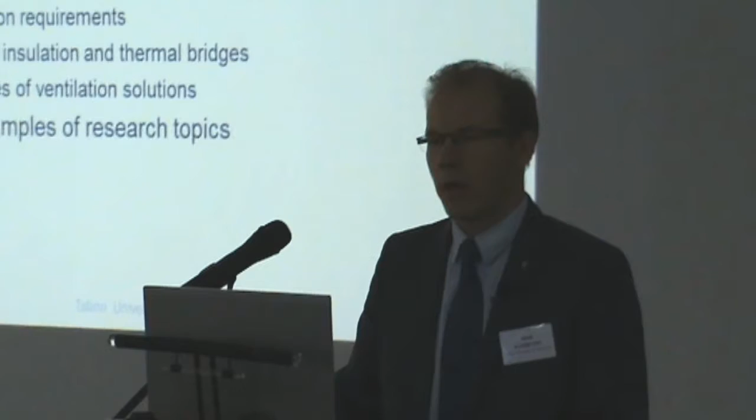Now I'll give some overview about Estonian achievements in energy efficiency related to new buildings and renovation, including Estonian energy performance requirements. Estonia was actually the second country after Denmark to launch nearly zero energy building requirements in regulation. There is also something for major renovations, but this is basically not driving the market. The renovation grant scheme, Kredex, is very well known and really a success story in Estonia, driving the renovation market. Most likely I cannot give many examples about our research topics due to very limited time.

Briefly, in Estonia the history starts from 2007, when the first primary energy-based regulation was prepared. Estonia was likely the first country in Europe conducting cost-optimal calculations. We also published this as a scientific paper, and it's the most cited paper I have ever published. These requirements have already been updated once, with new ones from January 2014, and these new requirements are called cost-optimal because they follow cost-optimal calculation principles, basically a 30-year life cycle calculation for residential buildings with the net present value method.

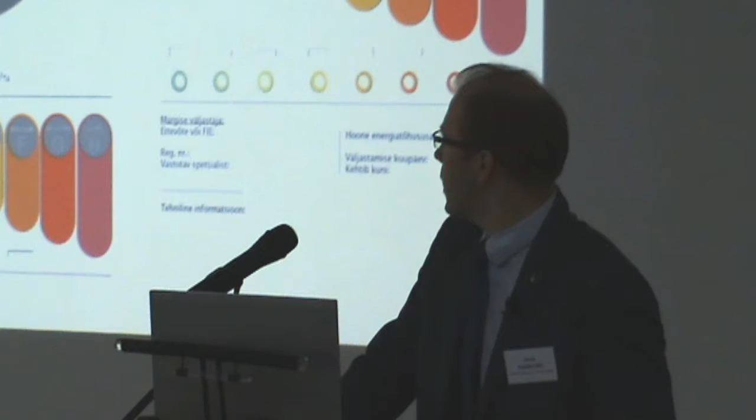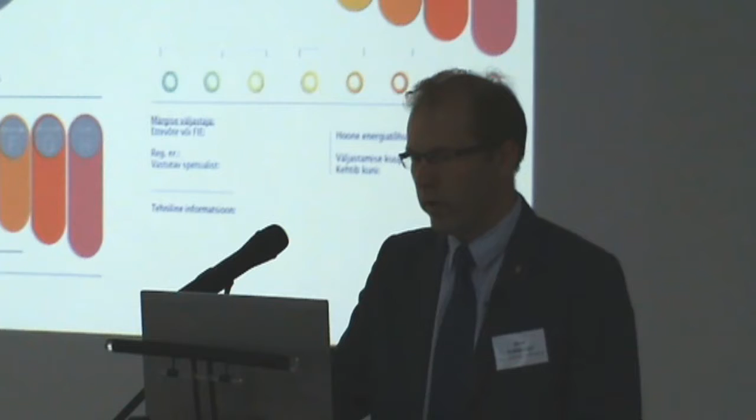How does it look? Estonian nZEB with A-class energy performance certificate is defined as nearly zero. Indeed, its requirements are published, but it's not mandatory yet. We are following the same time schedule as everywhere else in the EU.

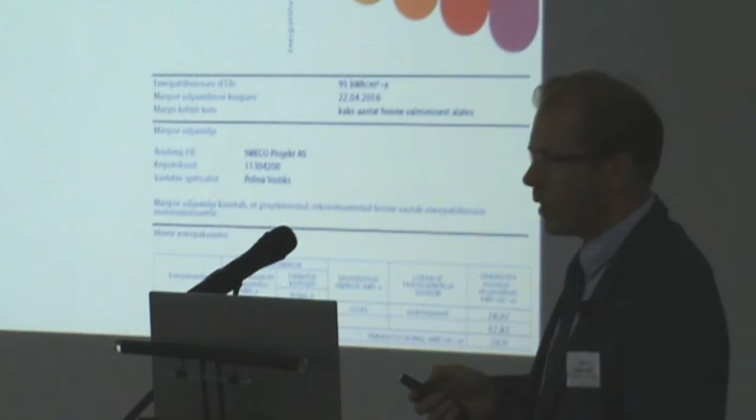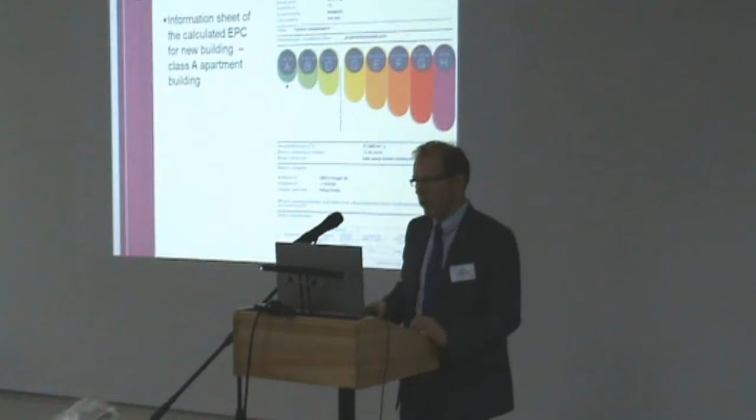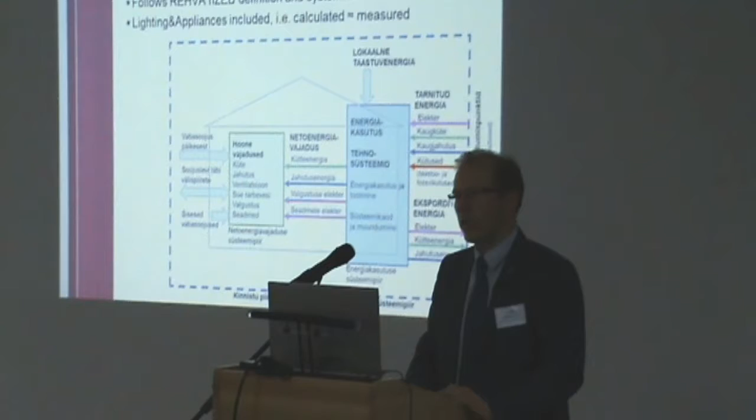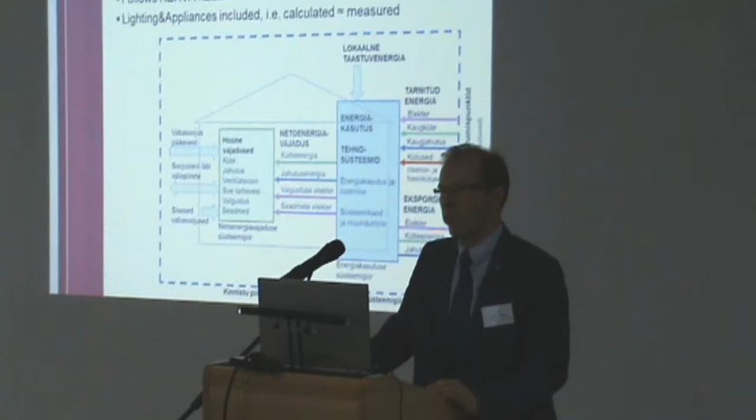This is an example of the information sheet included in that energy performance certificate. You can see this is actually for a Class A apartment building, one of the very first ones being built in Estonia. This is not very old, launched April this year, and the building is under construction. This will actually be the second apartment building which is nearly zero energy in Estonia.

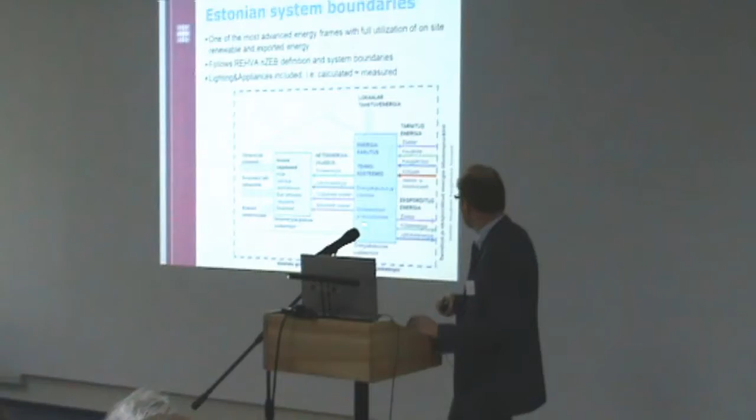The Estonian system is quite advanced - we are using an energy frame which enables full utilization of on-site renewable energy production, and exported energy is also enabled. So there are delivered energies and exported energies, and on-site renewable energy generation is included. It follows the European REHVA nZEB definition and system boundaries.

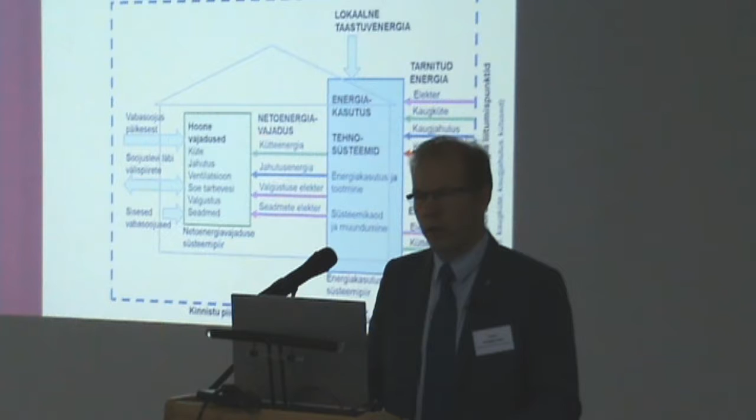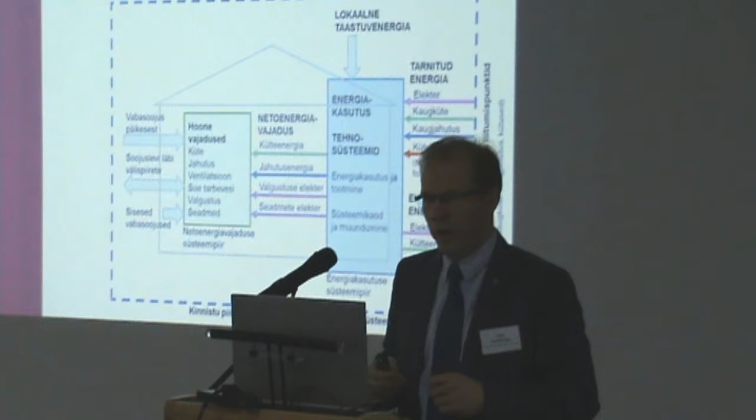What's very special in Estonia is that we have also included lighting, appliances, and plug loads. So it's some sort of all-inclusive energy frame, so that you can expect the calculated and simulated values to be quite the same as the measured values. This is not the case in many European countries.

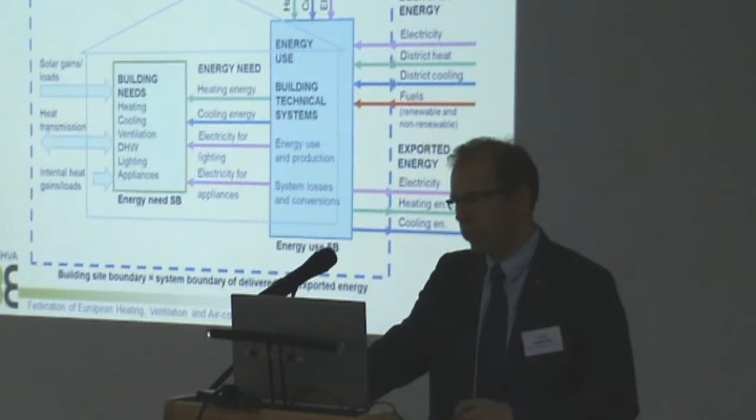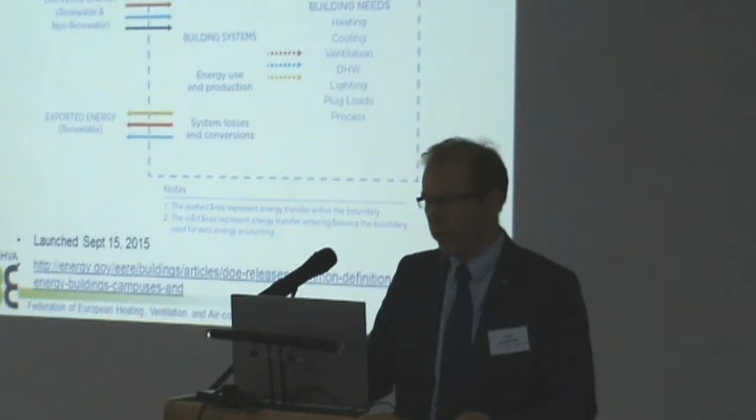This approach was launched by REHVA for European implementation as some sort of technical support for the directive, and has been very well followed in Estonia and, for example, in Finland and some other European countries, and very recently also followed by the US Department of Energy, which published a very similar recommendation.

In Estonian regulation, compliance assessment is based on commercial building simulation tools. There is no official fixed calculation method, but it's required in the regulation that you need a dynamic building simulation for most buildings. The only exceptions are residential buildings which do not have cooling systems, but for all non-residential buildings it needs to be a dynamic building simulation, and it's specified that the simulation tools need to be validated with relevant methodologies. There are also some requirements defined for which simulation tools can be used.

That's the way a very small country like Estonia can really tackle such issues, because a lot of effort has been used worldwide to develop building simulation tools, and they are very well available in the market, even not very expensive ones. So there is basically no need for the government to put funding into developing a national calculation tool. This has actually worked quite well in Estonia, being based on such commercial tools.

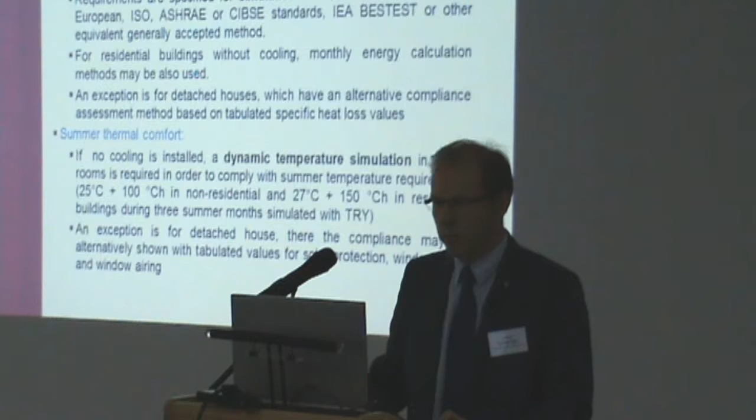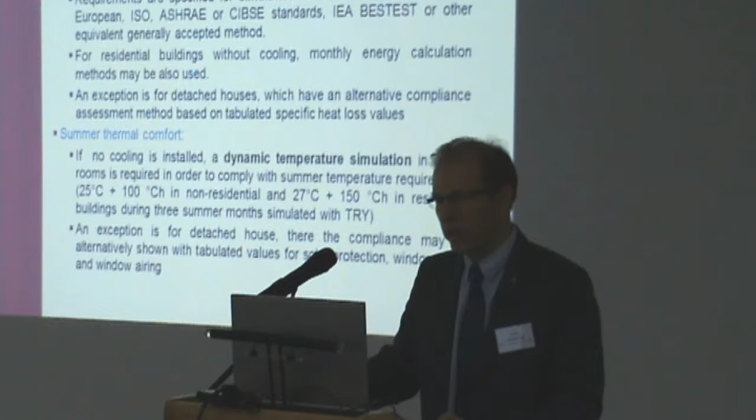The only exception is for detached houses, where you can use tabulated values to prove that there is enough solar protection, window sizes are not too large, and there's enough window airing for night-ventilated cooling to keep temperatures under control.

Starting from minimum requirements we have in force today, these are basically Class C requirements in Estonia, and it's not very easy to compare between different countries, but with some sort of recalculation it is possible.

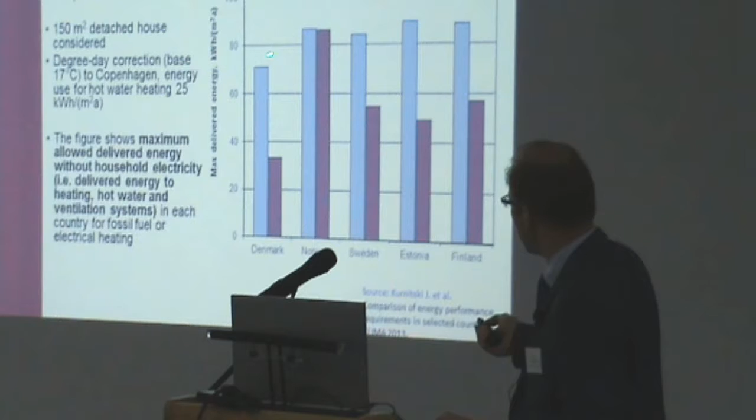This is for detached houses, and you can see very common oil or gas boiler heating, with Estonia, Finland, Sweden, Norway pretty much on the same level, and Denmark is known as a world-leading country in energy efficiency and renewable energy, so they have a bit more strict requirements.

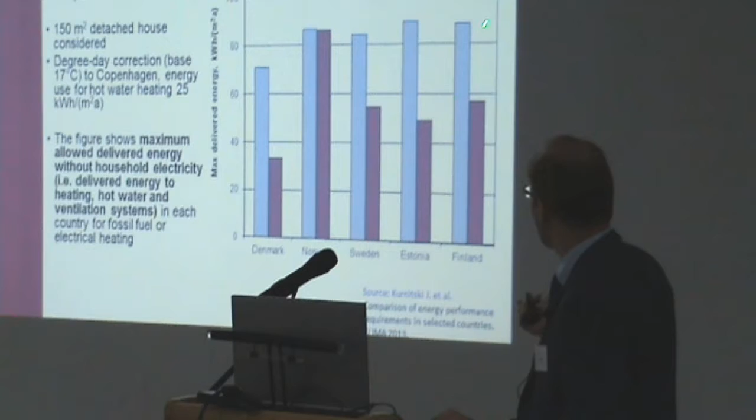It's quite interesting when we look at what happens with electrical heating, because of different primary energy factors and very different energy production, these values are not so consistent. For example, in Norway they do not distinguish between heat and electricity in the building regulation calculation, so there is no difference. In other countries it's quite a lot of difference.

Then a similar comparison for apartment buildings, shown in blue, considering district heating. Estonia is also one of these district heating countries where all major cities have district heating networks, similar to Finland or Sweden. It's quite amazing that in these Nordic countries the requirements are very close to each other for apartment buildings - the quality requirement for the energy performance of new apartment buildings is almost the same. Denmark is once again the leading one.

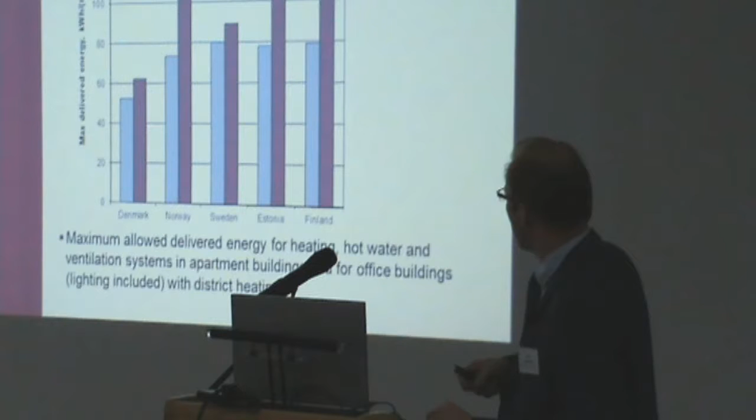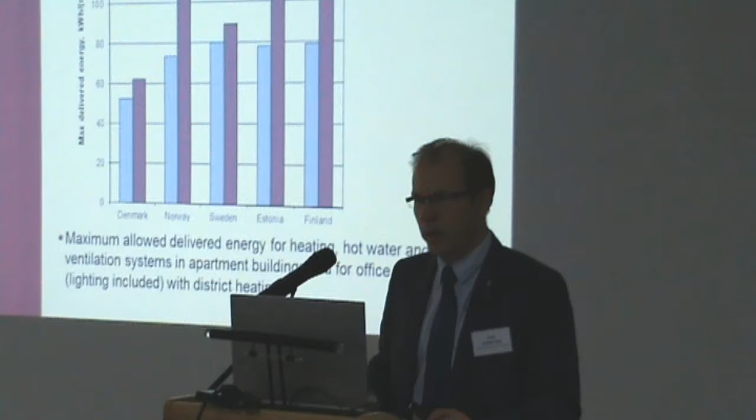When we go to office buildings, there is a bit more fluctuation for different reasons, especially for Finland - some historic reasons in the Finnish code, but this will soon be fixed with much more strict requirements. This is what we have today, and it's very difficult to compare what are nearly zero energy building requirements. I have a couple of ongoing master theses working on this kind of comparison, and it's really a mess - this data is not yet available, not easy to compare.

In Estonia we have specified requirements for 9 building categories, applying both for new buildings and for major renovation.

So primary energy factors you can see here: we are using for electricity 2, fossil fuels 1, district heating 0.9, and renewable fuels 0.75. And there are some examples.

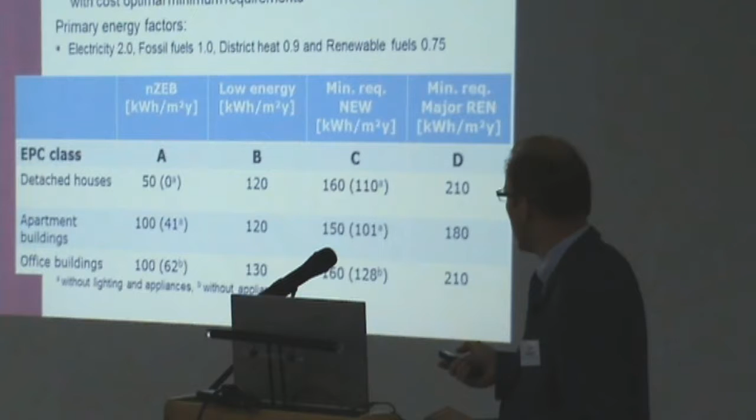For example, in apartment buildings, nZEB is 100, and the requirement we're having today is 150. The values here in parentheses are without lighting and appliances, because in many European countries they operate not with full values but with plug loads - lighting and appliances not included - which makes it more comparable to these countries. So it really depends on what is included in that primary energy indicator.

This is a full set of these 9 building categories showing that the energy use intensity in the buildings, and also operation times, are quite different, and the requirements - the numeric values - have a large variation.

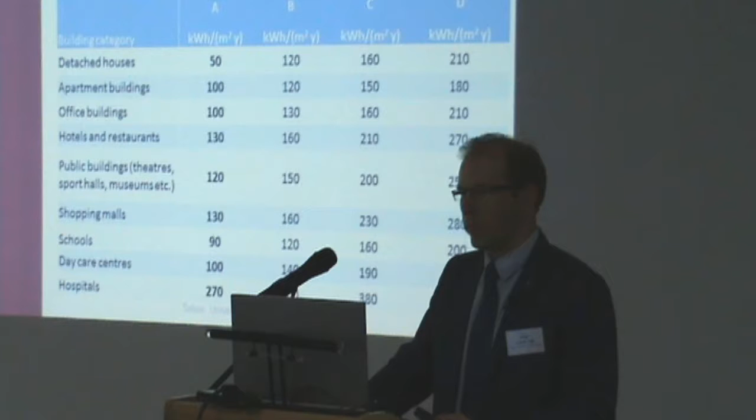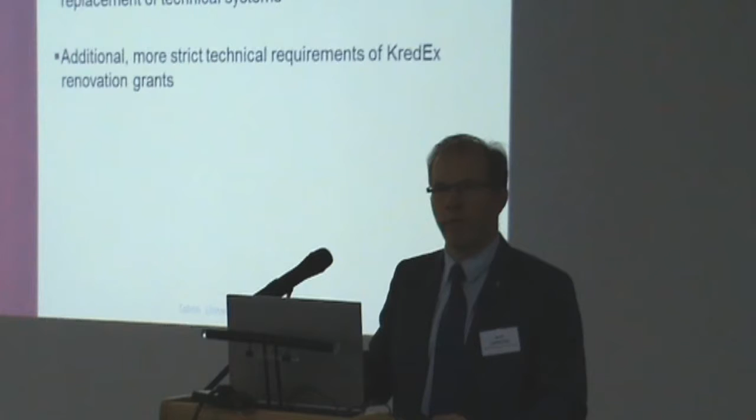When coming to the existing building stock and renovations, as the directive requires, Estonia also has minimum requirements for major renovation. It's actually energy performance certificate class D, but this is not driving the market, because very seldom is a renovation classified as a major renovation - it is always possible to do two renovations so they are not classified as major ones.

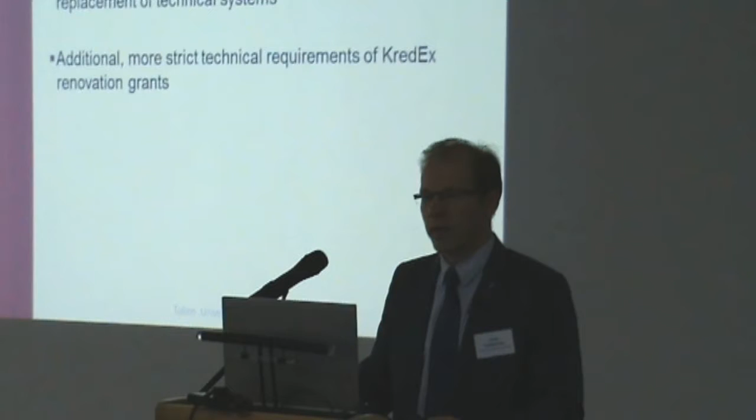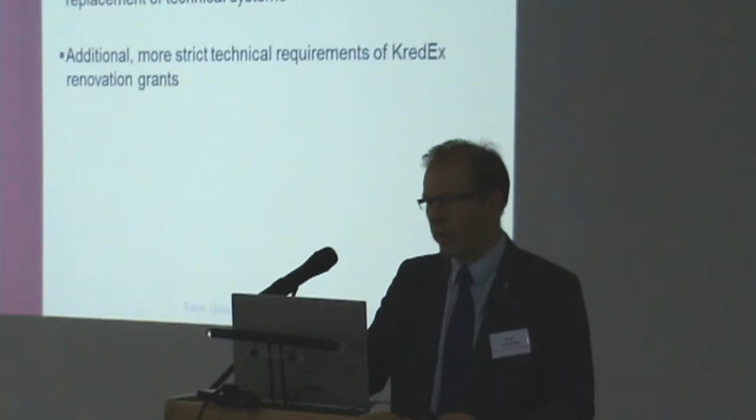So how can the market be driven? Just through some sort of incentives, and the Estonian KredEx scheme is based on renovation grants, which is basically direct financial support for apartment building renovations. This is really one of the European success stories - it's already been in use for a first 5-year period, and now the second 5-year period has started in Estonia.

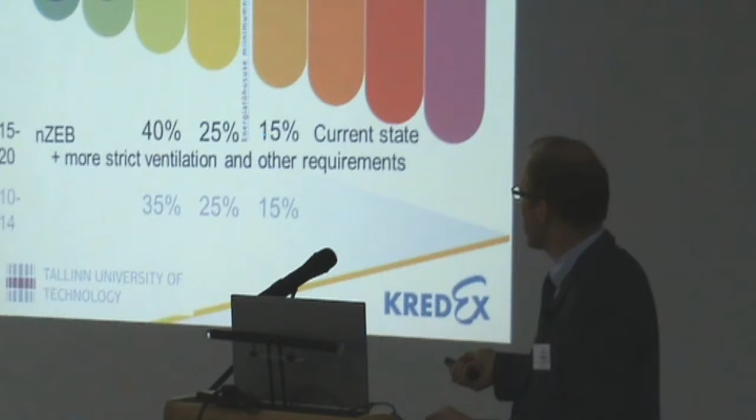It is built so that energy saving is not required as a percentage, but you need to achieve energy performance certificate class C for the highest financial support of 40%, and class D is enough for 25% of the support. The system first ran from 2010 to 2014, and now it's in its second term, with EU structural funds used to fund this system.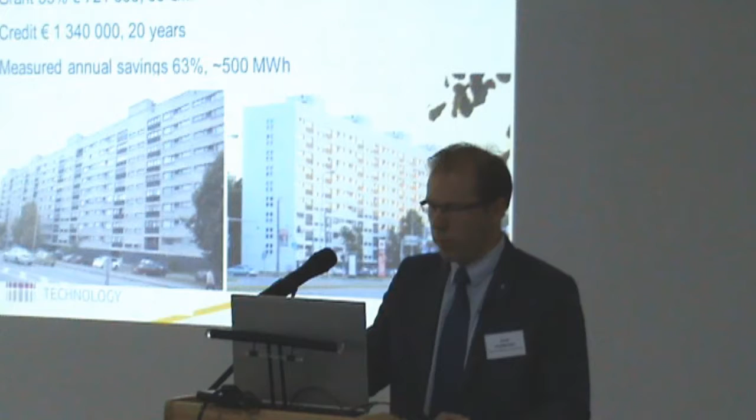This is one example from the first period: a major renovation with investment cost around 180 euros per square meter, and quite a big project. In this example, it's a full insulation of a building, as is common.

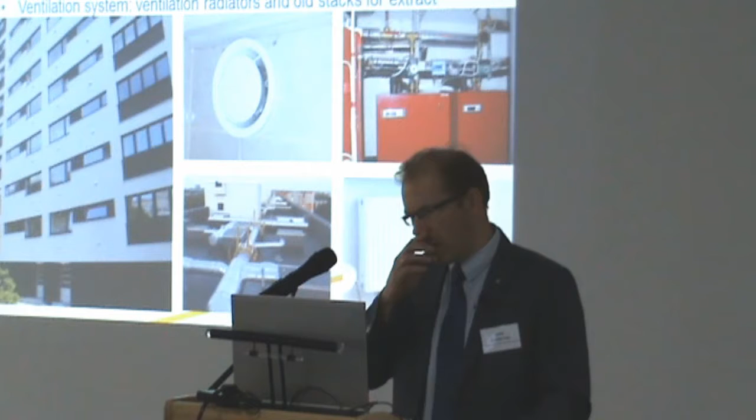The windows were moved to the insulation layer to avoid thermal bridges. The heating system, in this case district heating, remained, and it was supported by an exhaust air heat pump for heat recovery from the exhaust air. So it's basically mechanical extract ventilation, and the ventilation system included ventilation radiators to heat up and filter intake air. This is one of the most common systems, also used quite much in today's renovations.

But today we can do even better. And why these renovation grants are applied results from one of our research projects: we've been able to quantify that the tax return to the government is actually as high as 32% from a total cost of the renovation.

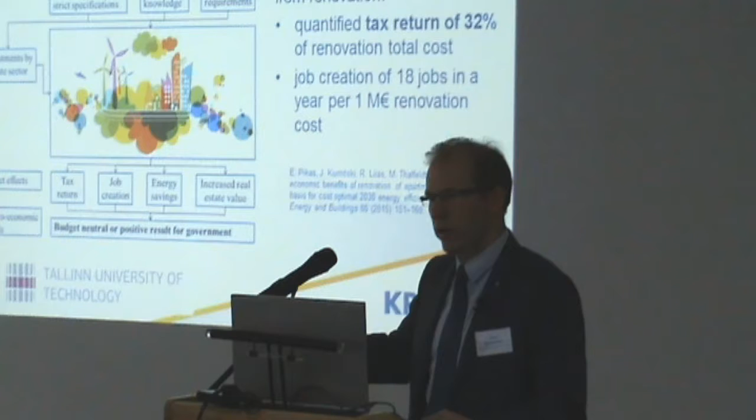This job creation is not bad either - 18 jobs created per €1 million renovation cost. We can really claim that this kind of direct financial support for renovation is budget neutral or even a positive activity for the government, based on research that has been based on real renovation projects and their cost structure.

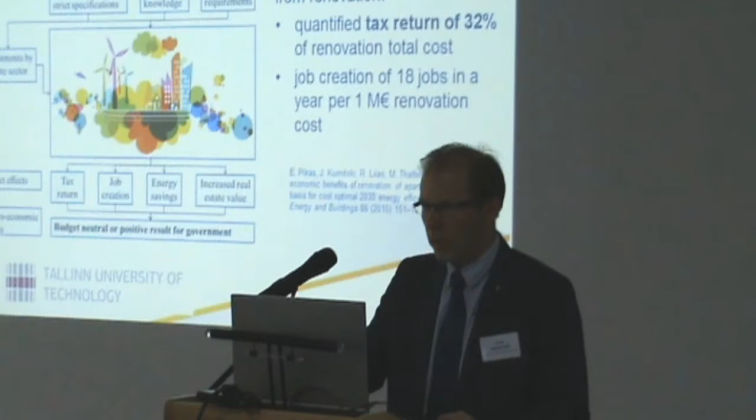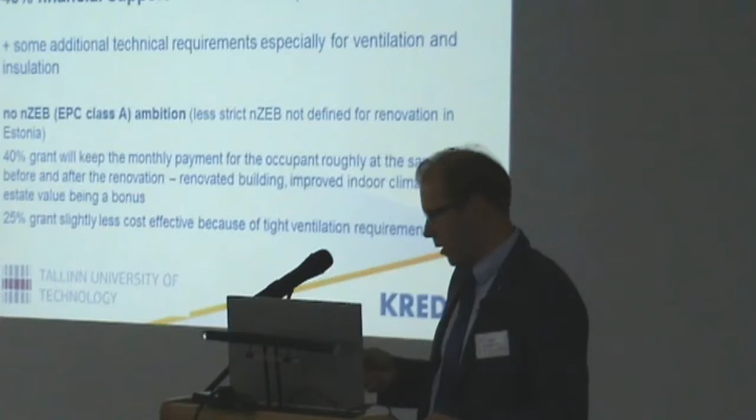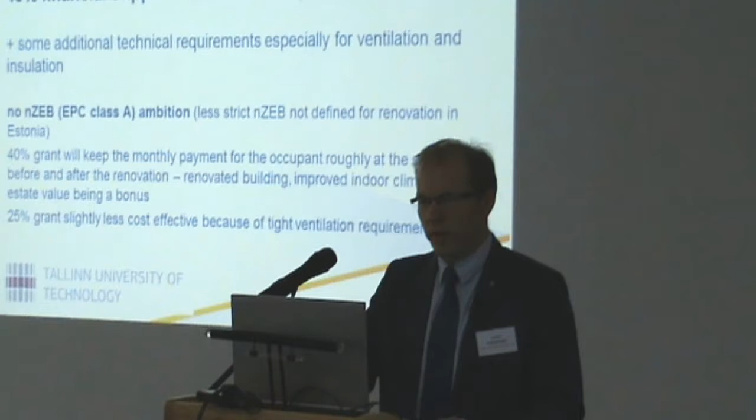So this is well justified, and that's the reason the highest grant was even increased to 40%. Basically 25% and 40% are the most common ones, and actually most applications have been for the maximum 40% financial support, because it's more beneficial for the building owners or housing associations applying for these grants.

The breakdown of a typical renovation requirement: primary energy is 150 kilowatt hours per square meter, but checking the energy need, you can see there's not much left for space heating when it's needed for ventilation heating. The domestic hot water value is a regulated, fixed value, but how much energy you use to heat what comes out of the tap depends on the system. For fans, pumps, lighting and appliances the values are fixed, and the total would be around 100.

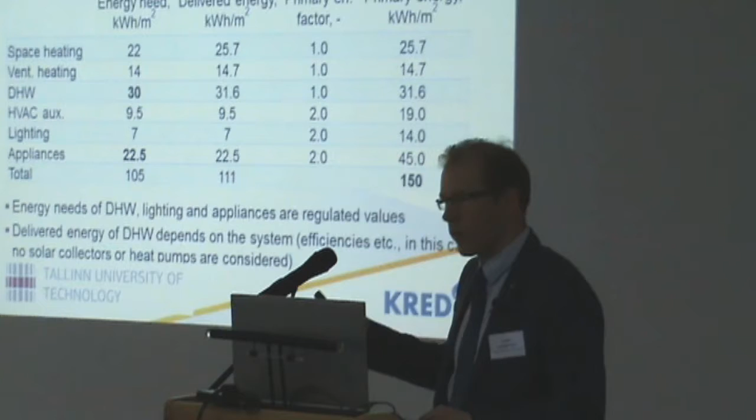Moving from need to delivered energy, you take into account all the system losses and conversions that happen meanwhile, and primary energy factors are applied. In the case of a gas boiler, used in this example, the primary energy factor is 1, and for electricity it's 2, and then it ends up at 150 - so this is the maximum. In the case of district heating, the primary energy factor would be 0.9, so it's a bit easier to achieve this requirement with district heating compared to gas heating.

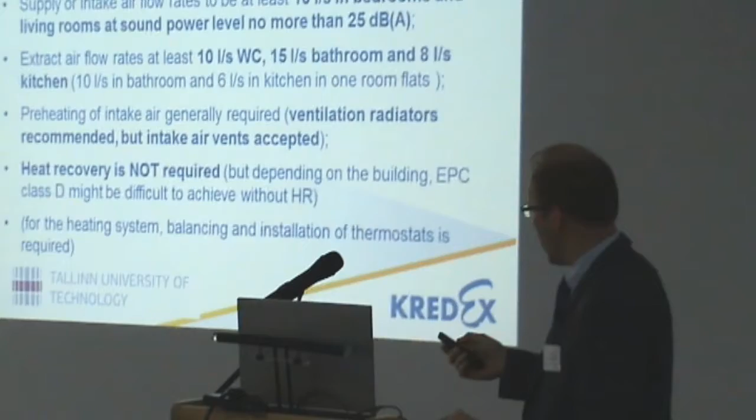Already mentioned earlier in the first presentation was the importance of ventilation, and this is also Estonian experience: in renovation there are three important issues - ventilation, ventilation, ventilation. That's really it. In the new requirements, we have specified how many liters per second per room you need for supply or intake air, or extract air in wet rooms like toilets, kitchens, and bathrooms.

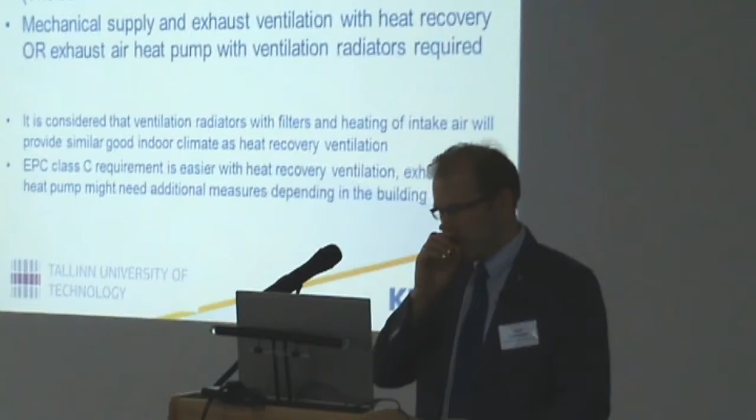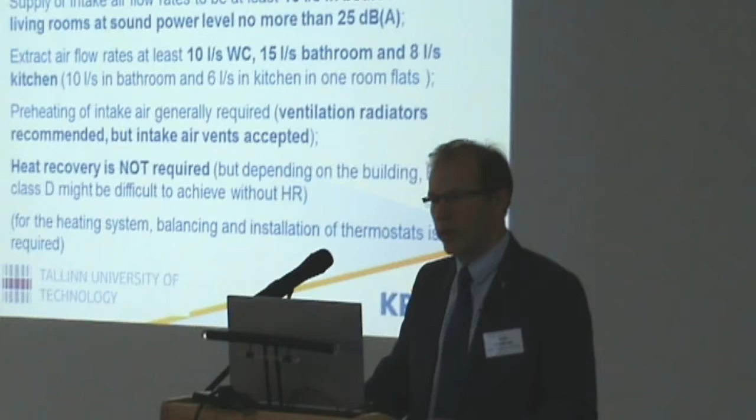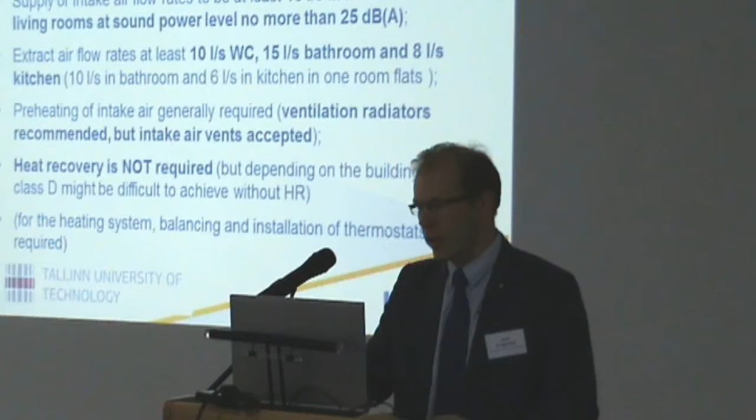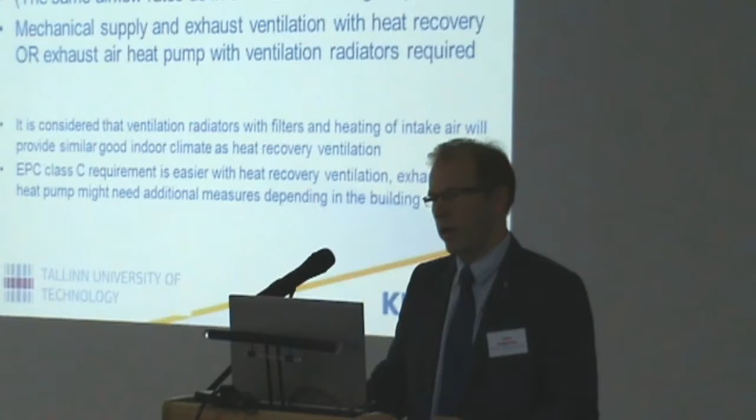In this 25% renovation grant, heat recovery is not required, but you do need to achieve energy performance with these defined ventilation rates. In some buildings it can be quite challenging, and it would be good to have heat recovery, but basically it's not required. For the 40% renovation grant, heat recovery is required - it can be either mechanical supply and exhaust ventilation with heat recovery, or an exhaust air heat pump with ventilation radiators. So basically these two systems are accepted, and others are not.

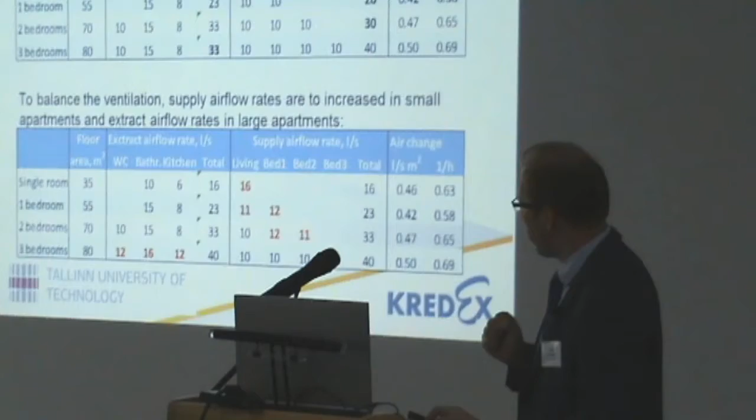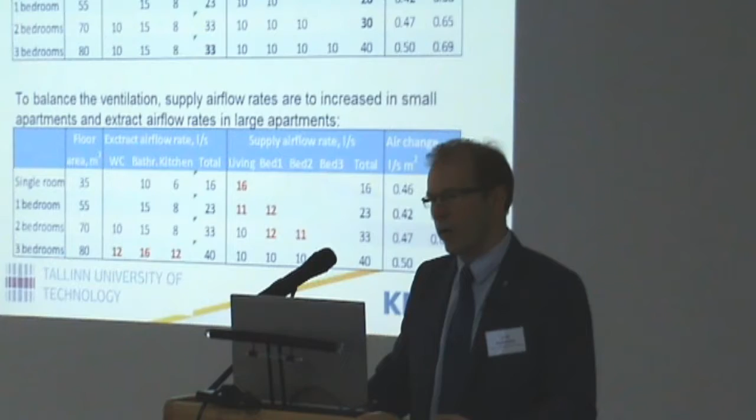Designers really need to do this airflow, a ventilation calculation, and it's also required that it will be measured. Measurement protocols are required before handing over and paying the last part of that financial support.

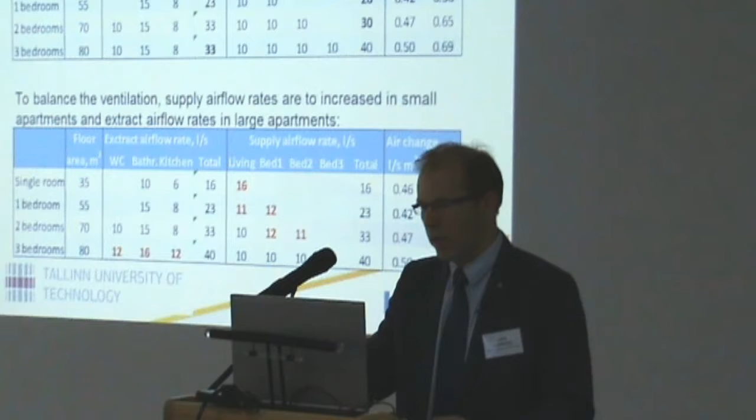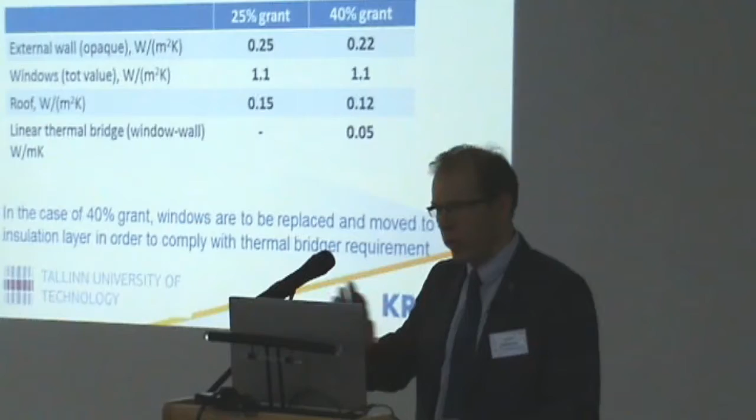This really changed the market. Now the ventilation systems that have been installed are balanced, they are measured, and the airflow rates have been achieved. So no more mold and moisture problems, and problems with insufficient ventilation - it seems to be working quite well.

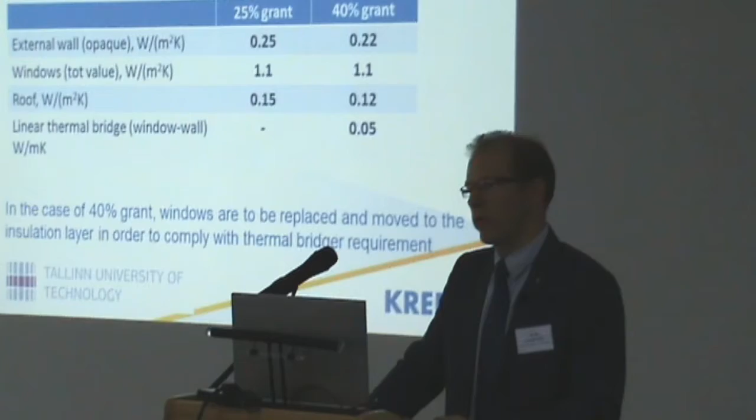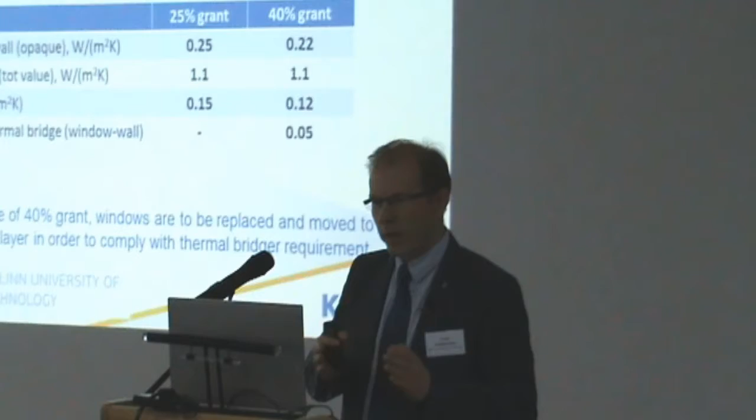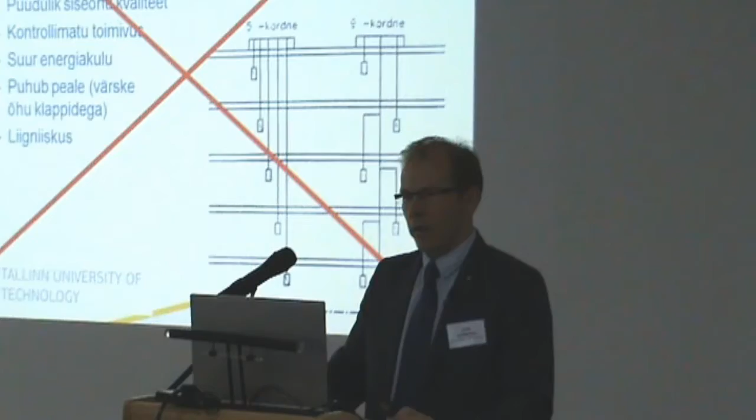Insulation requirements are quite tight, and in the case of a 40% grant, it also applies to thermal bridges, meaning you need to move the windows from their original locations to inside the insulation layer. Natural ventilation is no longer accepted, no way to go if somebody wants to get these renovation grants, not possible.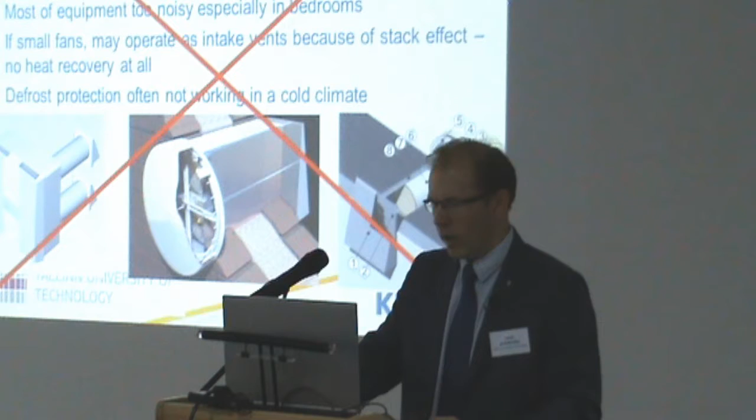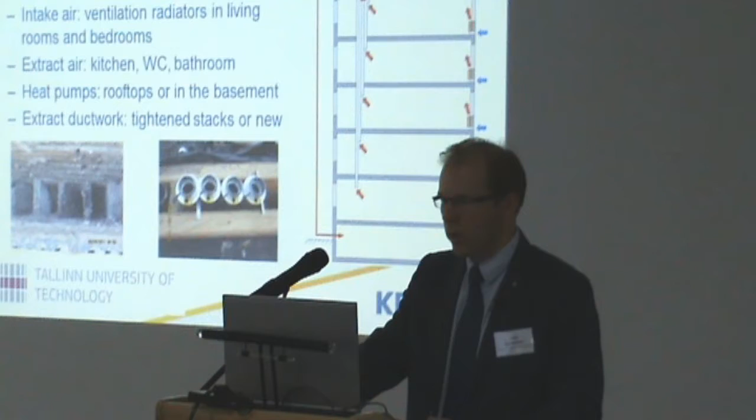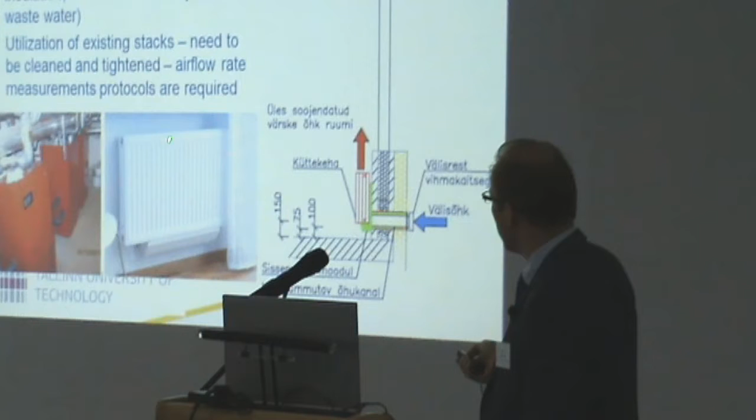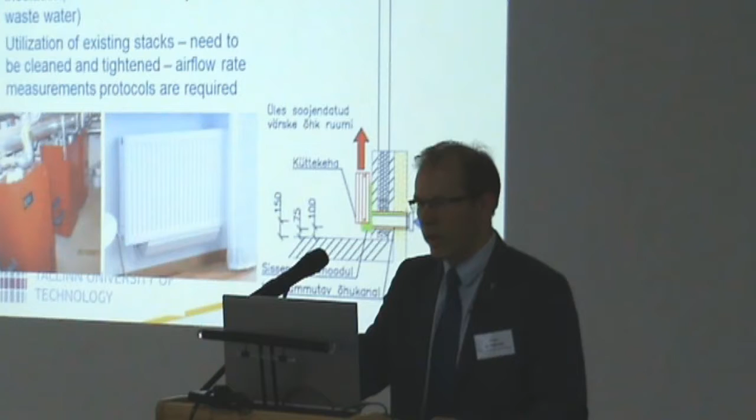So ventilation solutions in use are mechanical exhaust with exhaust air heat pump and ventilation radiator. This is one basic solution that is accepted and used on quite a wide scale. It's very important that these ventilation radiators are used as commercial products, meaning outdoor air is heated up in the radiator, with an air filter for supply air. This preheated air enters the room at almost room temperature, so there should not be draft problems, and it's filtered air, which is important in the city environment.

As I told, we can do even better, and now it seems that mechanical supply and extract heat recovery ventilation is really possible to apply in renovation. This applies only for a couple of countries, I would say Estonia, Sweden, and maybe somehow also Finland, where these kinds of solutions have been used.

It's tremendous work to get these through, and it seems that in Estonia we have succeeded, mainly through ductwork installations into the facade. Because there are 20-25 centimeters of external insulation, there is quite a lot of room for the ductwork, so there's no need to go into the apartments. All construction work inside apartments is very complicated in these kinds of renovations, so this ventilation work can be kept on the roof and in the facade, almost nothing in the apartments. This seems to be a solution for apartment buildings.

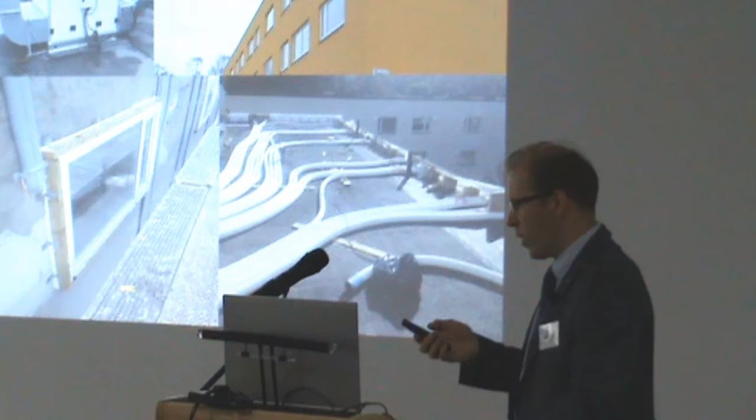They have also found that plastic, somewhat oval ductworks are more flexible and easier to install, and this seems to be a very economic installation of the ventilation and air handling units on the top of the roof, all within the insulation layer. This is how the building looks after renovation - it has mechanical supply and exhaust ventilation with heat recovery.

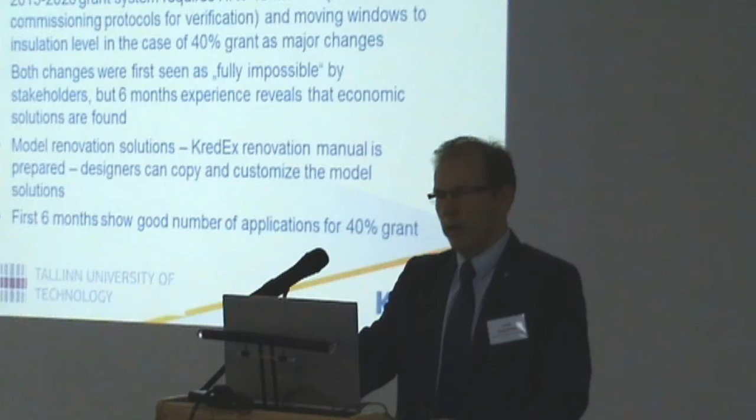In most cases, they can utilize existing stacks for extract air, but in some cases extract ductwork has also been installed to the building envelope because they see that it's difficult to comply with ventilation flow rate requirements using old stacks, which are not airtight and could be very leaky. It really depends on the building, but in any case, supply air ductwork is installed to the building facade. So this is how it goes in Estonia.

Just to conclude my presentation, there has been a lot of research effort to make this possible in Estonian renovation. We have had quite many doctoral theses on the renovation of apartment buildings. Regarding new building research, we have a facility, 3 years old, for nearly zero energy building test bed, which is quite unique, I would say, on a European scale. This is for solutions applied in new buildings, both for HVAC systems like heating and ventilation systems, renewable energy systems, and also building envelope.